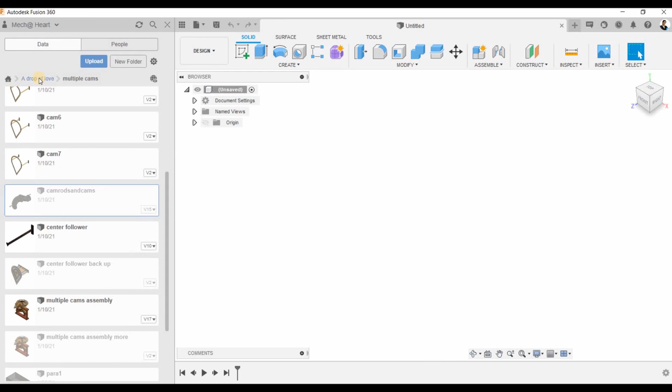In the previous lecture, we have seen that making parametric is not very useful when it comes to cam rods and cams assembly. So let us just copy the one that we had created in the multicams folder and put it into the parametric folder. So here I have the same file.

Now let us start assembling our parametric product. So I'm going to name this as parametric assembly and click on save. Now let us bring in the parametric support.

Now the support, I'm going to ground it. So I'll just right click this and I'll click on ground. So based on this, all the others I'm going to assemble.

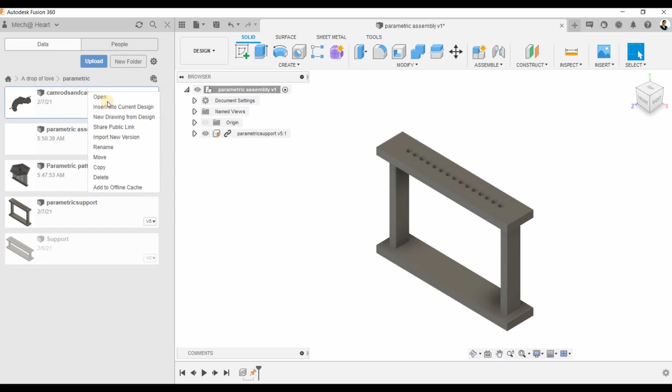Now let us bring in cam rods and cams assembly. Here we are not going to use joints for assembly. I'm just going to place it and bring it to approximately the same position. This is only for reference. So later, once we have finalized the pattern, we can give the exact joints.

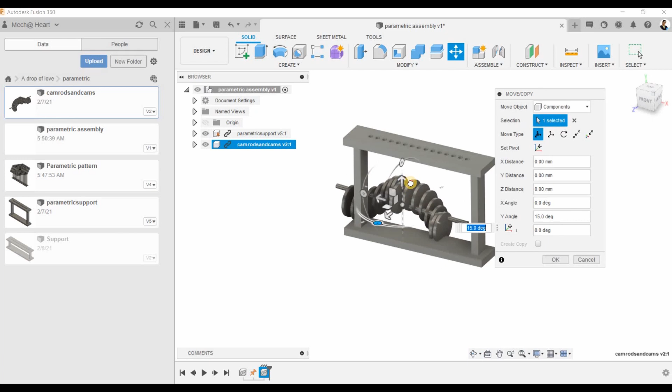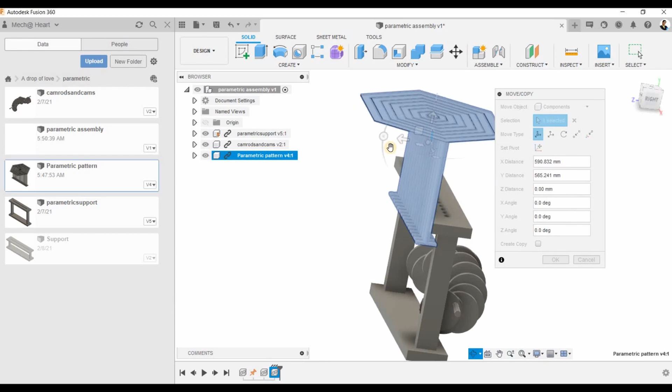Next, let us bring in the parametric pattern. So here, I'm going to keep it approximately in the same position as how it would be once joints are applied. So now you can actually check before you finalize this automaton toy that you want to make.

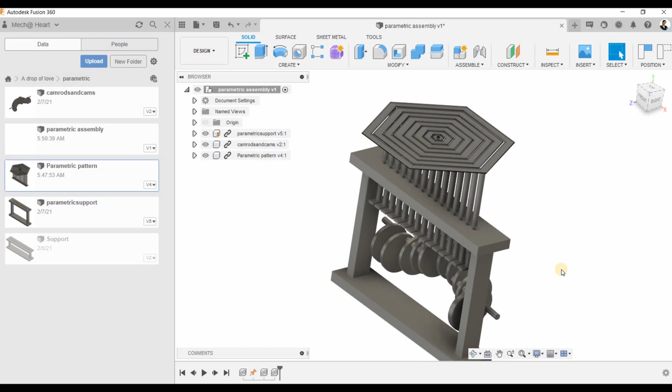And if you're satisfied, you can go and make this into bodies. And from bodies, you can convert the pattern into components, and then after exporting, you can bring them one by one over here. Or if you want to make a change, you can go to open and go to the sketch where you have to change the pattern.

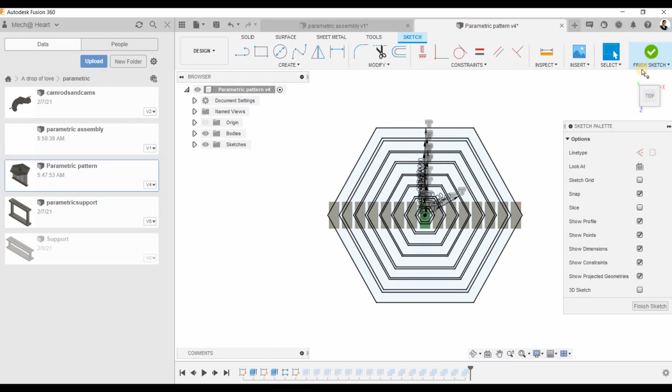So after you have changed the pattern, again go to finish sketch, and then again you can cross check over here how the look of that pattern is, and then export each one of the parts after combining them. So after all these steps, you can export and then go for motion study in parametric assembly by bringing each one of them.